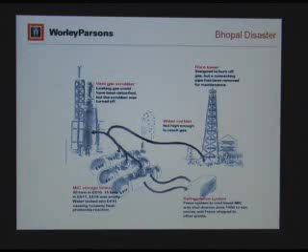And the last measure is a water curtain, supposed to be the last resort to neutralize whatever comes up from the flare tower. But the thing is, the curtain was not high, the water couldn't shoot high enough to reach there. So basically, all these safety devices and measures were compromised, and that's what caused the major danger.

So after these two major disasters, it forever changed the public attitude towards our industry. Actually, AIChE was the first to launch the Center for Chemical Process Safety, CCPS, in 1985.

And afterwards, Congress passed the Emergency Planning and Community Right to Know Act in 1986. Then EPA in 1990 passed the Clean Air Amendments. And then in 1992, we have the OSHA rule of 29 CFR 1910.119.

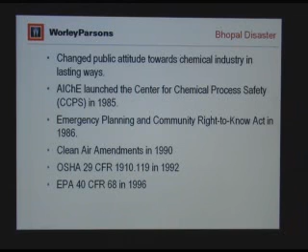About this, actually, Union Carbide was later bought by Dow. And I remember, I guess Dow said after they bought Union Carbide, they set aside $2 billion just to settle all the claims afterwards. But I don't know if they actually gave it to anyone for that. Basically, that's just saying the shareholders even realized how bad this was -- they were willing to pay out of their pocket to settle whatever lawsuits and problems came after.

And I guess after this one, there's another one that happened pretty recently. It actually affected me a little bit more because it happened in March 2005. I guess 2005 was the time when I actually started working on HAZOP. Also, the people involved here are actually all Jacobs engineers from Pasadena. That's why I wanted to talk about it -- that's kind of the reason I think it affected me most.

So basically, it's a BP refinery in Texas City that had the explosion on March 23rd, 2005. This happened during restart of an isomerization plant, and what happened is the distillation tower and the blowdown drum were flooded with hydrocarbons.

Basically, there was a geyser-like release from the vent stack. And then there was a truck idling next to it as well, so that's how it ignited and caused the explosion.

Basically, 15 workers got killed and 180 others were injured. And many of the victims were actually working in the trailer located near the explosion. Those were workers through Jacobs contractors, and they were working on something unrelated to this, and they were not aware that the plant was restarting up.

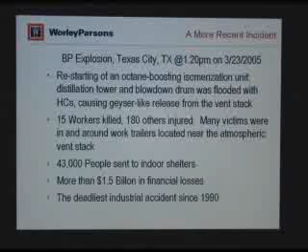The aftermath was 43,000 people sent to indoor shelters, and more than 1.5 billion in financial losses. About a month or two ago, there was a 60 Minutes special about this. A girl was suing BP for the damage, because she thinks it was caused by the ignorance on safety issues by BP, and both of her parents were killed in this incident. This is the deadliest industrial accident since 1990.

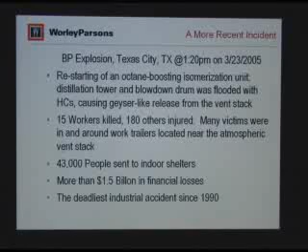I think this is about everywhere. Yeah, but this is 1990 - the Bhopal one is like 20-something years ago.

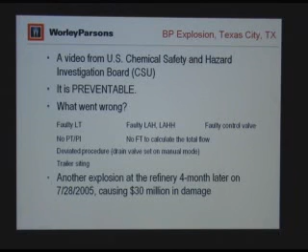Starting from this point, there's actually a lot of regulations about safety, and we have a U.S. Chemical Safety and Hazard Investigation Board to investigate what happened. I'm going to show a video that simulates what happened in the process.

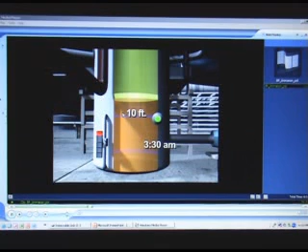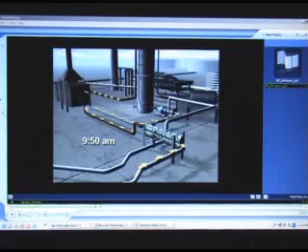Basically what it explains is, during the restart up, the hydrocarbon overfilled the tank. There is a level gauge, but the level gauge is not high enough, so once it goes over the level gauge, you cannot see the level. There's supposed to be a level alarm, and the first alarm was triggered, and there's supposed to be a high alarm, but that one was not working.

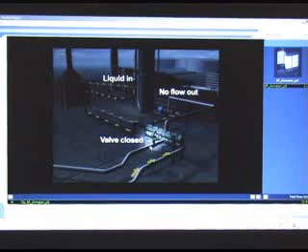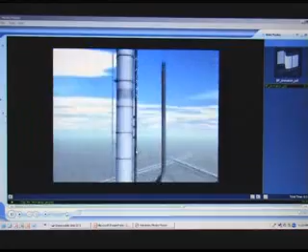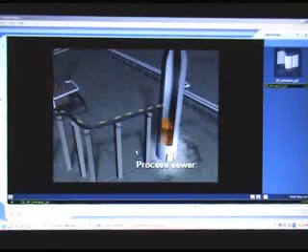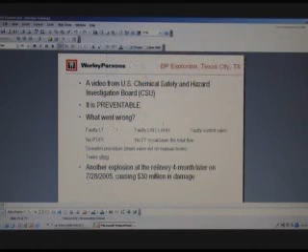I apologize that people probably don't hear it. I'll try to load it on the website so you can check it out later on. Now let's try to go back.

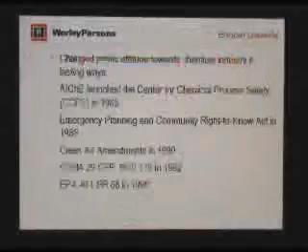Again, this is a preventable accident, with a faulty level transmitter and faulty level alarm - both high and high-high didn't work - and the control valve didn't work, and no pressure indicator or pressure transmitters, and no flow transmitter to help calculate how much flow is actually getting into the tower. So there's no way for the operator to know what's going on at this point.

There's another problem - it deviated from procedure, and the drain valve was set to manual mode to close instead of following the procedure. When something like this changes, it actually needs to go through a safety review to see what potential hazards there can be. Also, the location of the trailer was too close to the hazard area. I think after 2005, there's a new regulation saying no trailers are allowed in any hazardous area. In old days, if you went to a refinery, you'd see a lot of engineers working in trailers right next to the plant. Nowadays it's not allowed. What's interesting is after this explosion, this exact refinery had another one four months later, with $30 million in damage.

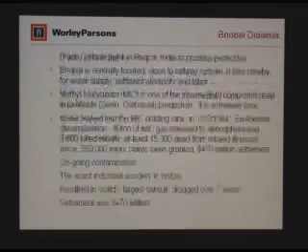Acronyms? Okay. Oops, am I going too far here?

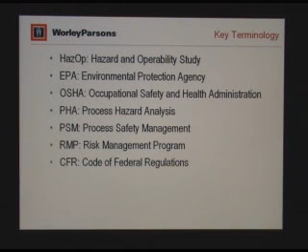He's talking about the previous slide. The one that hurt. Which one? The BP explosion where you showed the video.

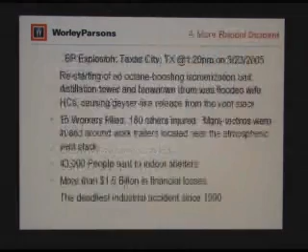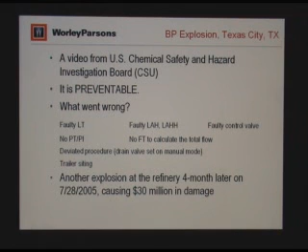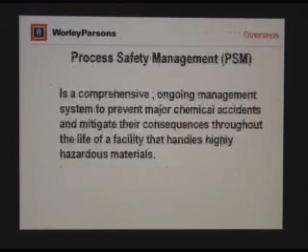And so I guess with all the incidents, it's natural that we know it's going to be regulated, right? So let's talk about the OSHA and the EPA regulations. I put a lot of information on the slide, and it's kind of on the boring side, because all we need to know is we need to do the process hazard analysis, which is called the PHA, right?

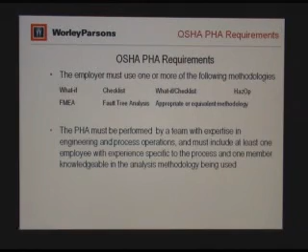The OSHA regulation is called process safety management. It is to prevent a major chemical accident and mitigate their consequences throughout the life of the facility that handles highly hazardous material. There's a list of what they call the highly hazardous materials as well.

And the EPA risk management program is used for chemical accident release prevention. The OSHA final rule is February 24th, 1992, and effective from May 26, 1992. The EPA one was about 2 years later.

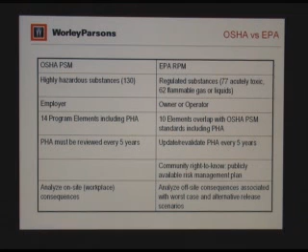Oh, you have some? Yeah, like what is the RPM? Oh, this is RPM - remember the acronyms? The RPM is Risk Management Program, if you read here. RMP, sorry. Thank you, I need to check that. Thanks.